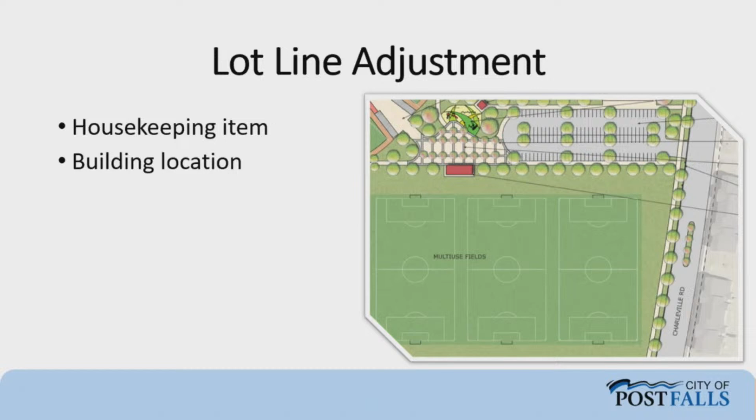Good evening, Mayor, members of council. Robbie Quinn, Parks Planner, and I'm here seeking council's approval for the mayor to sign a few deeds related to a lot line adjustment at our Quarry Sports Complex site. So it's really just kind of a housekeeping item as we get closer to phase one construction. The site is about 26 acres composed of 2 lots, and currently there's one lot line that directly splits one of our proposed buildings right here. And so just a summary of what we're doing for phase one. It'll be the 2 soccer fields, parking lot, plaza, the restroom building, our maintenance yard, and then 2 add alternates, one for the playground and one for the sports courts.

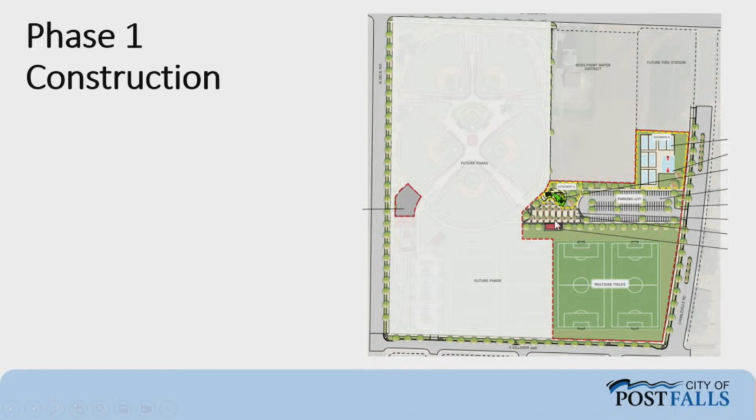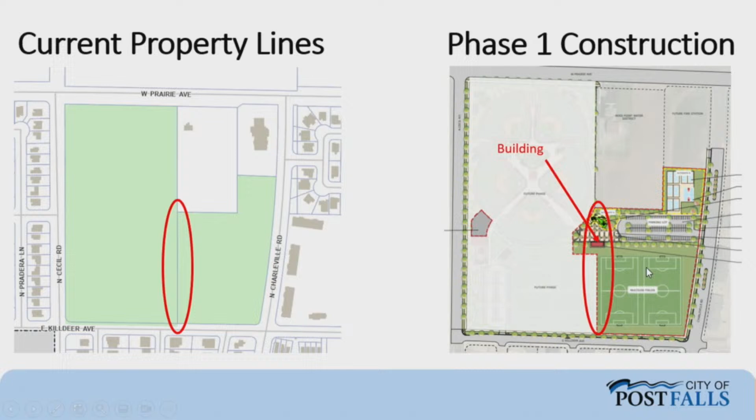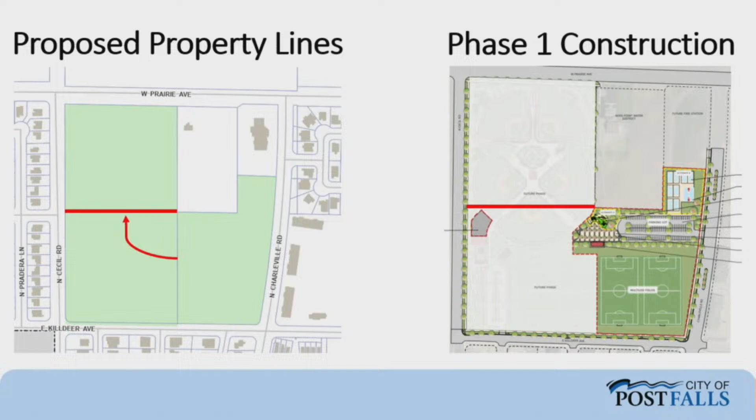And as I mentioned, the restroom shelter building is where we currently have a lot line. And so on the left here is the GIS, you can see our 2 different lots. And this one goes right down this building, and we can't build it on 2 separate parcels. So what we're proposing is to basically move that lot line over, and then it won't bisect any other future buildings. This way we can keep all of phase one under one parcel, and set us up for the most flexibility in the future. It's kind of a long project. If anything needs to happen, it's easier to keep our 2 lots, and if we needed to come back for a subdivision, this process is much simpler. So with that, I'll stand for any questions.

You answered my question. I was going to say, why not go with just 1 lot, but you answered that for me. So, council comments, questions? Entertain a motion. I move to approve the Quarry Sports Complex lot line adjustment. Second. Motion second. Further discussion. Roll call, please. Ziegler. Aye. Westland. Aye. Davis. Aye. Stigleader. Aye. Motion passes. Thank you. Thanks, Robbie. Next up is well number 4 rehabilitation recommendation of award.

I liked your other shirt. Inside joke, what was on the shirt? Lawnmowers. It was bright green and had some lawnmowers on it. I thought it was classic. You decided to change. Felt summery with all the snow.

All right. Oh, that's a nice picture adjustment there.

Well, good evening, Mayor, members of council. Jackson Fleshman, Project Manager, City of Post Falls, here to present to you a recommendation of award for our Well 4 Rehabilitation Project.

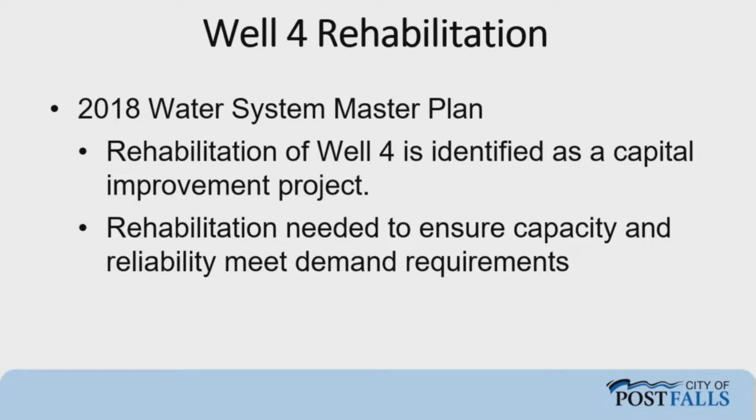So as mentioned, co-located with the skate park, constructed in 1974, and there's a whole host of reasons it needs to be replaced, but a couple, there's no on-site backup power, and the existing pumping capacity is below what our design capacity is. Identified in our 2018 Water System Master Plan as a 6 to 20-year project too, I believe, which means we're on track, so going into 25.

Some of the specifics, so really it is a full replacement other than the wellhead itself. So it's getting a new well house, new pump, on-site backup power with a new generator. There's some pipeline improvements, so there will be a little bit of work that goes into Greensferry, getting away from some AC water main. And then fun part of this project is going to be some on-site coordination with parks and PD, some of which has already happened. So part of this project, the PD is going to get some upgrades to their camera systems out there.

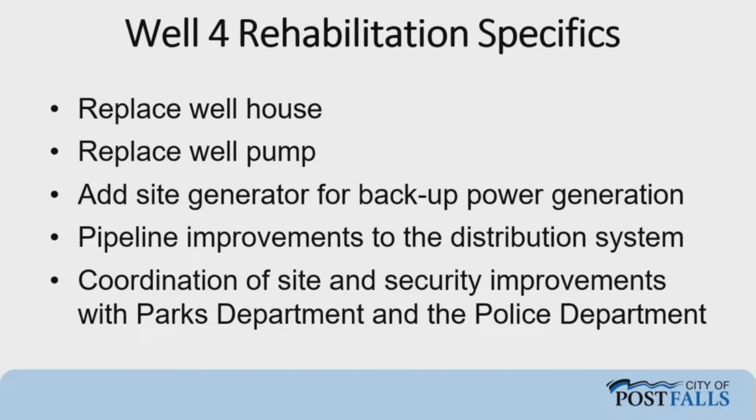And then our parks departments, we're taking up a little more space, but I think it's going to overall make the site look nicer. Getting a little bit of landscaping around the well fencing. And then I think we're getting a location for a portable restroom cover. I think, Robbie, you can speak to that. But yeah, so overall, I think we'll make the park look nicer than when we first disturb it after we're done.

So November 13th, we had 6 bidders come out, and WM Mulch Corp came in with the low bid at $1.68 million. There were a couple irregularities, which delayed review of the bids. But after review with JUB engineers and our city legal staff, none of them seemed to deem the bids unresponsive. So WM Mulch Corp seems to be the low responsive bid.

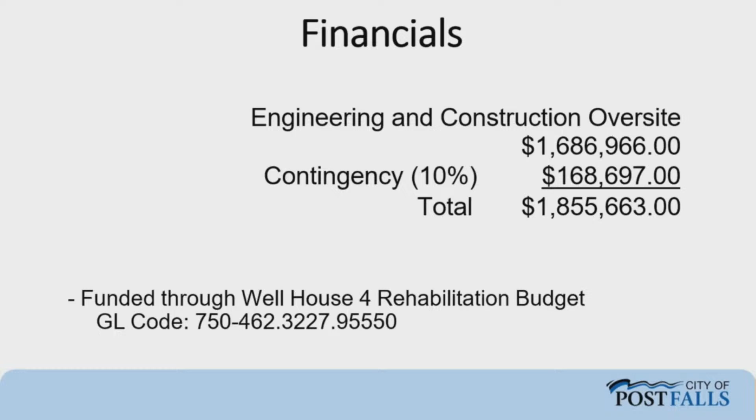The actual request tonight is for the 1.68 with a 10% contingency for a total of $1,855,663. And this will be funded through the Well House 4 rehabilitation budget. Next steps after tonight, execute the notice of award with this request. Construction should begin in 2025 and it should end in 2025. 1-year projects, that's our goal.

Questions? Have we dealt with this contractor previously? We have not, no. Would you like to know anything about them? Well, I'm sure if legal's looked at it, you've looked at it, you're comfortable with it? Absolutely, yep, low responsive bid. We've had a conversation with the contractor. I think part of their bid, just as a piece of information, they're located very close to the well site. I think they're like a mile away or something. So I think that might have had something to do with that. But yeah, so I'm glad they're local.

Yeah, yep. What other questions of Jackson? Just to be sure, this account that we're funding this through has the appropriate amount of money in it presently to do this? I'm going to defer to Craig potentially on that one. I believe so, yes. Okay, funds there? Yeah, okay, great, thank you. Yeah, pretty sure, but I didn't want to say. We're getting a nod of confirmation from Craig. So. Perfect, okay. Any questions? Not on this, no. Thanks, Jackson.

Entertain the motion. Move to approve well number 4 rehabilitation recommendation of award. Second. Motion seconded. Further questions? Discussion? Roll call, please. Westland, aye. Davis, aye. Stigleader, aye. Ziegler, aye. Motion passes. Thanks, Jackson. Awesome. Happy holidays, guys. You too. Thank you as well.

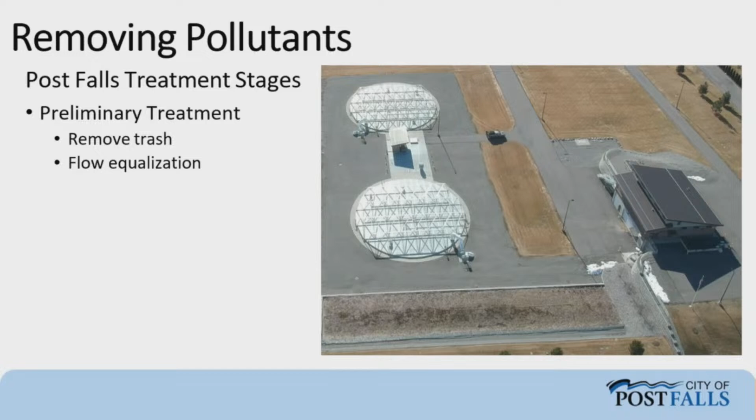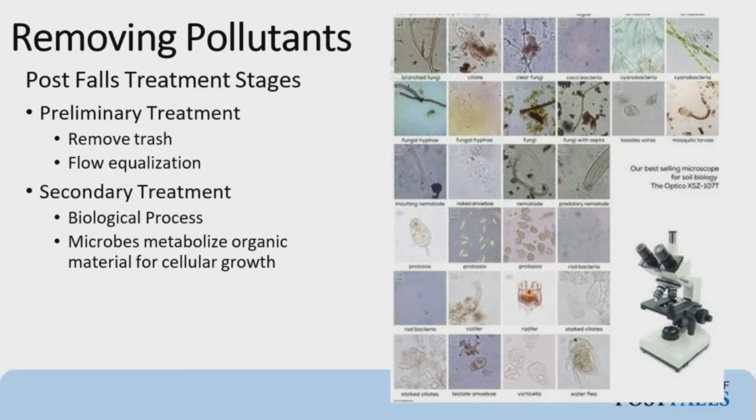Our existing process, which we've relied upon for decades, is a secondary treatment process. It's a biological process, and really the goal here is we're trying to create the conditions where microbes can grow, and through their cellular growth, through areas of high oxygen or low oxygen, we get them to respire and get rid of some of the nitrogen, or build cellular growth and bind phosphorus in their cellular growth. And then we can slough that off and get rid of it through secondary clarifiers.

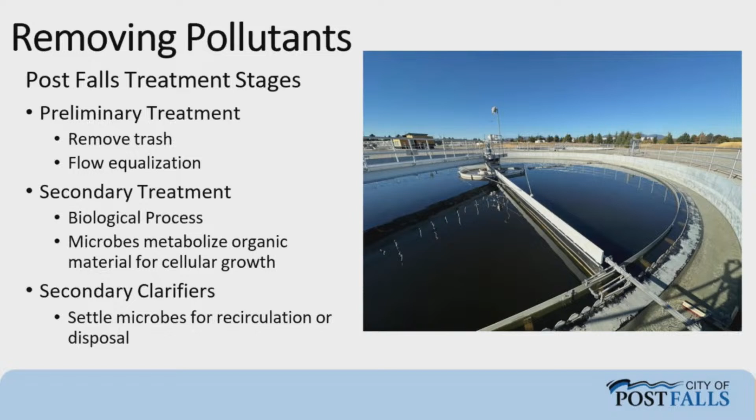Currently, I should maybe say a couple months ago. So also coming off the secondary clarifiers is the clarified water. And historically, what we've done is disinfect that with UV treatment, and that's what goes to the Spokane River. The new facilities that we're building will be on the tail end of this. So all the water will still go through all the existing facilities that we have. We're just adding additional treatment to the tail end of it.

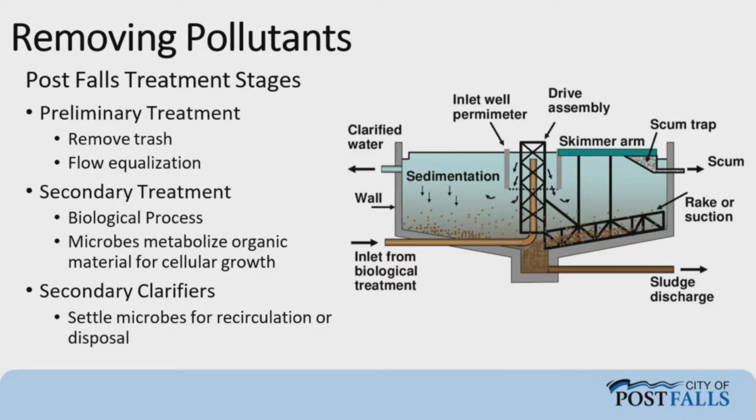So this basic process has treated us really well throughout the years. Right now, coming into the facility, we see about 190 pounds per day of total phosphorus. That's the constituent, the contaminant, the pollutant, synonyms of what we're going to be talking about. So coming into the plant, we see about 190 pounds per day on average. And through that secondary process, we're removing 96% of that total phosphorus and currently discharging about 7 pounds per day

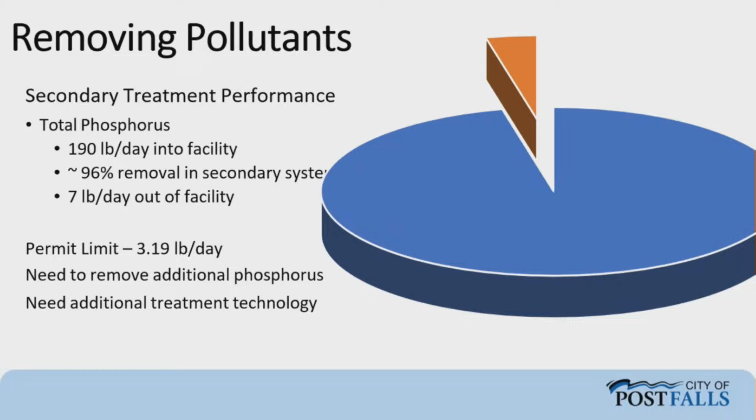out of the facility. The permit number, which we knew in 2013 and we've been given time to plan, design, and construct facilities to meet, is 3.19 pounds per day. So as good as we're doing, that 96% removal through time-tested processes still isn't enough to get us down to that 3.19 pounds per day. We need to remove additional phosphorus, and to do so, we need additional treatment technology. So we were granted time, like I said, in our 2014 permit to do that.

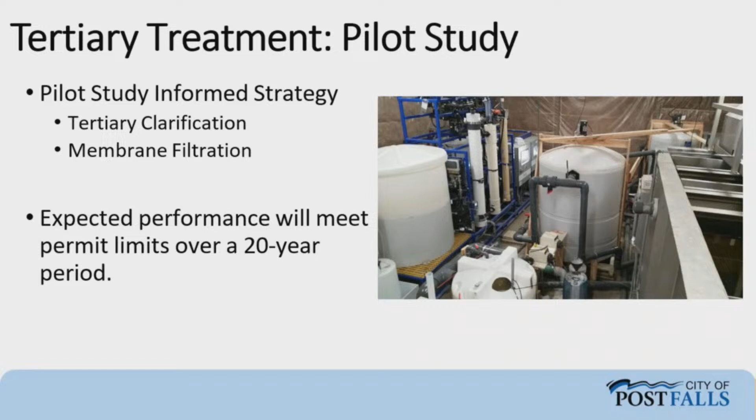So we did a pilot study, and it showed, I think, as it shows here. So the pilot study informed our strategy of using tertiary clarification and then membrane filtration to be able to meet that 3.19 pounds into the future. So we'll go through each of those processes a little bit, give you an idea of what they do and why we need them. The first is tertiary clarifiers, and where the secondary treatment process is more biologically driven, we're trying to grow the bugs and let them settle out. This is a much more chemically driven process where we're relying on adding chemicals to that treated effluent.

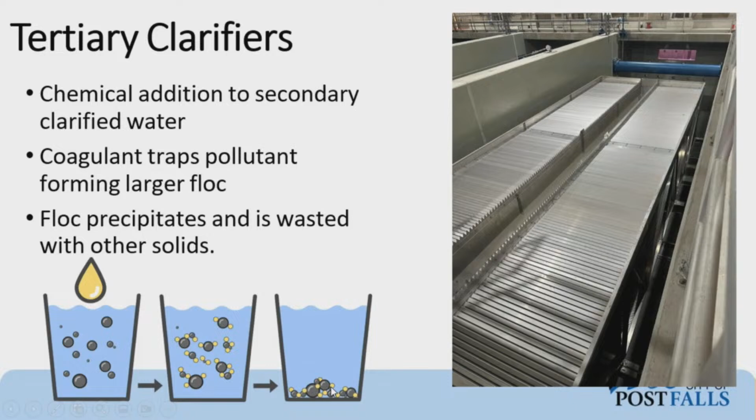And what happens is the phosphorus binds and settles out, and we'll be able to pull that off the bottom, and the clarified effluent is going to come out of the top. These are what's called an inclined plate clarifier. And when we have everybody out for a tour, what you'll see is the clarified water coming off the top and exiting out that center channel there. All the solids that we're trying to remove are going out the bottom. So they're settling out to the bottom and removed, and they go out with the other waste solids.

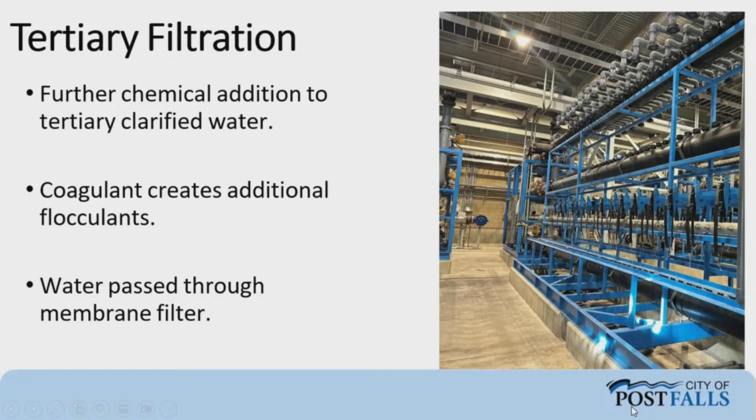So beyond that, we have tertiary filtration, which some of that tertiary clarified effluent will go through. Oh, I have to apologize. This is an older picture. These are our membrane racks, and this was before we had the membranes in them. They have been populated with our membranes. So progress has taken place, and we are to the point where we're in startup of these new facilities and making sure that they're operating as designed before they're fully handed over to the city to operate. So I have a new picture. We have membranes in the membrane rack.

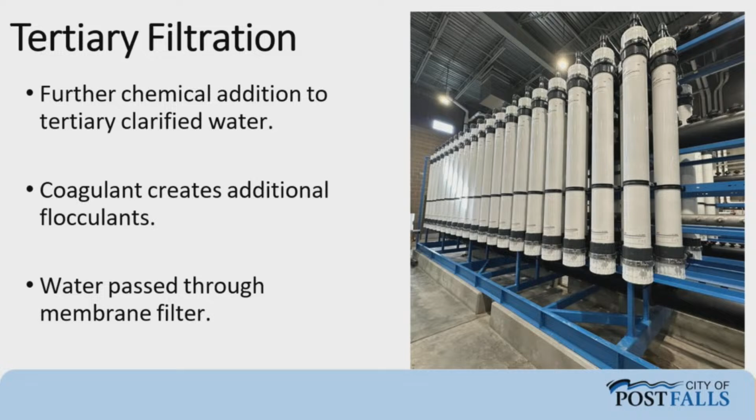An additional chemical addition step will take place before it goes to these membranes. And really what's going on here, if we looked at the end of one of those membranes, inside there is, sorry, I'm trying to count, 1,242 of these, joking, hundreds and hundreds of these fibers that run the length of that membrane. And think of these as a straw, and they go the length of that package, and we're forcing the water through, but it's not going just through this straw. I'm trying to think of the best way to describe this.

So the pore size that I say here is 0.03 microns, or 1/1,000,000th of a meter. And that's not the size of the hole that you can see on the end here. That's holes down the length of that straw. So the untreated water, so to speak, is going to go down the length of the straw and get forced through these tiny pores on the side. So only the water that we want coming through is going to go through the pores down the length of the straw and all of those waste solids will be sent back out into the waste stream here.

So as I say, for comparison, human hair is between 17 and 180 microns. So the pore size here is approximately 1/500th the finest human hair. So these are very, very tiny pores. So you can see, to push water through this, it takes a lot of energy, a lot of effort. When we're really going after those last pieces of tinsel, we're really upping the demand, the effort to do that.

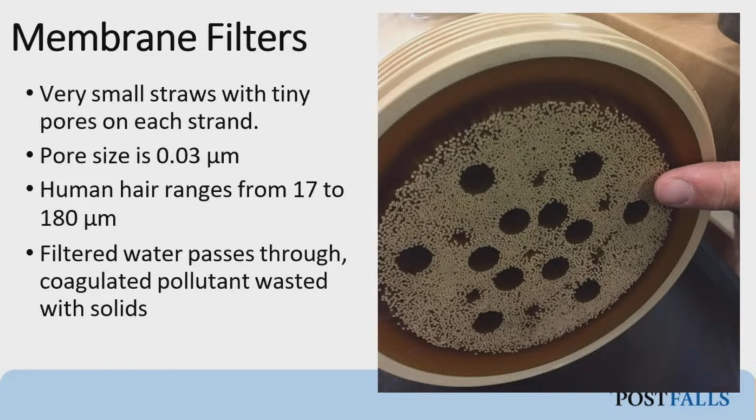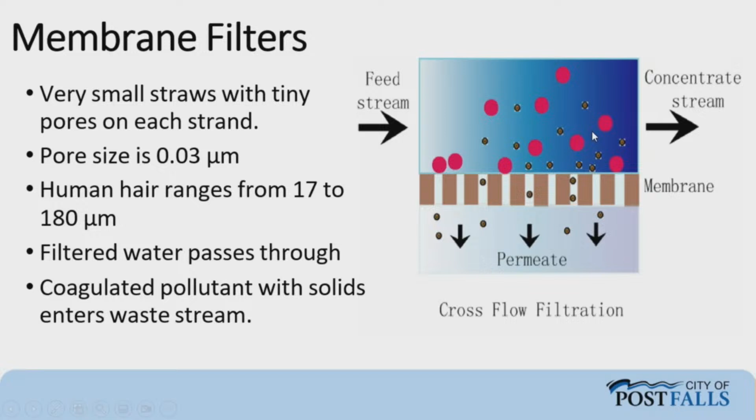This is kind of a profile of what might be going on with those pores. Really, the permeate, think of permeate as that fully treated water coming out the other side of the membrane filter, and the waste solids moving through and going out with the other solids from the other processes.

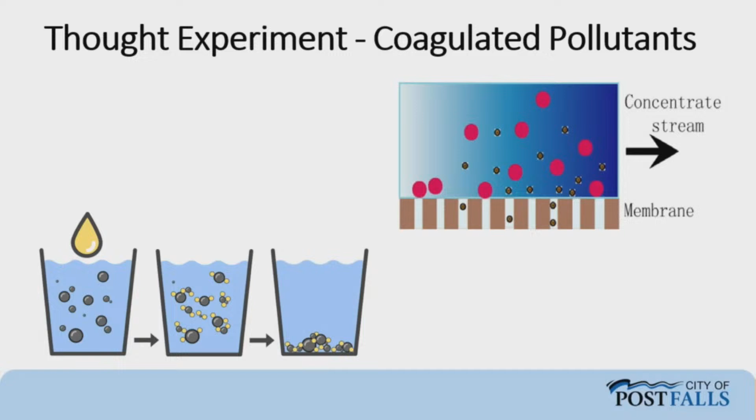So going back to our thought experiment, you can see how the goal of this tertiary treatment is to make clumps of our pollutants. It makes it easier to remove. So if we think of our Christmas tree, that's kind of like putting that tinsel on a garland. At the end of the season, you can just pull that one strand off, and it's much easier to do. So anything we can do to clump those pollutants together is going to make it easier to get at that last little bit.

We're not fully done treating. Water coming from our tertiary system will be going through ultraviolet light for disinfection prior to the Spokane River. And the new treatment technologies will also allow land application to our recycled water sites, which we have talked about, and I'm sure we will talk about into the future as well.

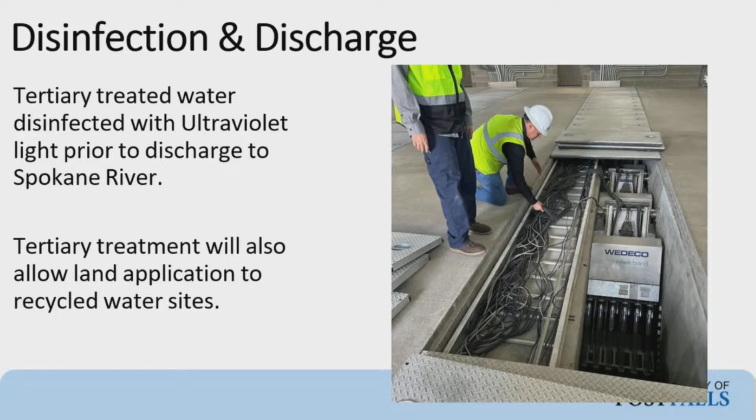Where do we go from here? So the facilities that we are in startup of right now will allow for treatment of 5.2 million gallons per day. We're currently seeing at the facility about 3.1 million gallons. And based on anticipated growth, we have a time plan for when we will need to bring on additional secondary treatment units and tertiary treatment units. But philosophically, the treatment strategy is going to stay the same.

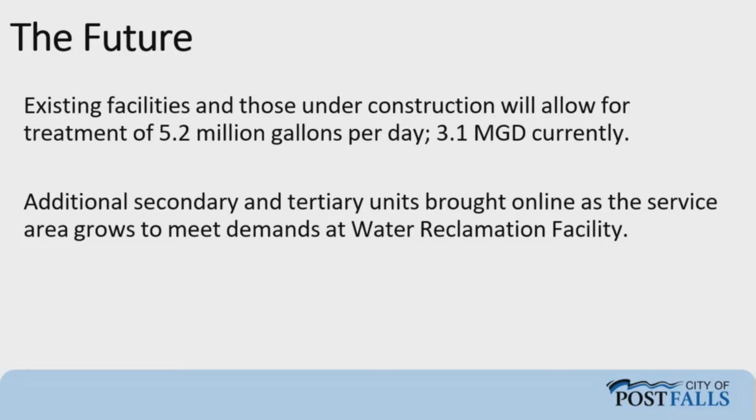What we're doing as part of startup right now is what we call optimization of the amount of chemical to put in, how much water needs to go through tertiary clarification or membrane filtration after tertiary clarification. So we make sure it's an efficient system, so we can meet that final effluent limit, but we're not overdoing it, so to speak.

A couple comments and a question. Yeah. First, I'm going to date myself. I remember putting those individual strands of tinsel on the tree. They weren't combined into the garland. They were individual, and they were a mess. Second, I'll never be able to look at a Christmas tree again without thinking of wastewater.

But my question is, if and when the city goes to land application, do you have to hit those same levels of clarity on the discharge? They are different permit requirements. Yeah. It's a totally different permit through the same agency. It's still through Department of Environmental Quality. But oddly enough, the constituents that we're most concerned about change a little bit. With river discharge, total phosphorus is the dominating constituent that we really are focusing on. Land application, it's much more nitrogen-based. They want to make sure nitrogen isn't going into the groundwater.

Okay. Interesting. I'm just curious if land application may prolong the life or the use of the technology that you're installing now, if you're not going into the river as much.

It would not prolong it. Okay. No. Comments? Thank you for the explanation. Thank you. Yeah. Have you patented that yet? Or copyrighted it, or whatever the term is?